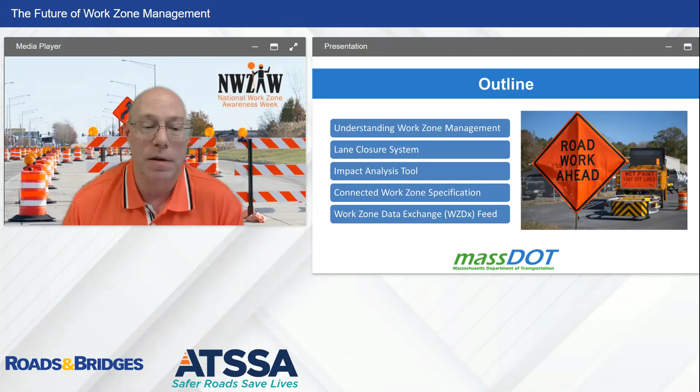Let's start with first asking the question, why is work zone management important? The data speaks for itself. Other than dropping a bit during the post-COVID year of 2021, the number of fatalities involving workers on the roadway shot back up to its highest number in 2022.

And I venture a guess that this level has not changed for 2023 and 2024. Looking at the types of events resulting in fatalities on our roadway construction sites, the worker on foot is clearly at the greatest risk. But more than a quarter of people are still dying while inside of a vehicle out in the work zone. They are seemingly thinking that they are protected. However, they are still being struck and killed. This effort is designed to end this horrible tragedy.

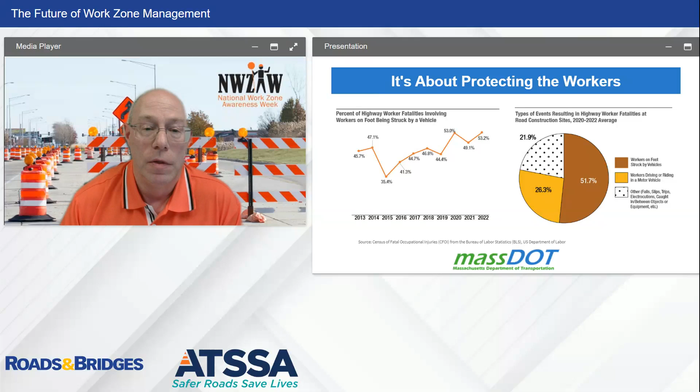Just a quick recap, National Work Zone Awareness Week, as Kevin mentioned, today is Go Orange Day. I hope that everyone, like myself, is wearing their orange today. Tomorrow is a Social Media opportunity to share stories and statistics about why work zone safety is so important and why we need to keep workers safe. Finally, on Friday, we pause for a brief moment to remember the lives of those that were lost out on the roadways, and hope that number never increases. Our workers deserve to go home each day to visit their family and friends.

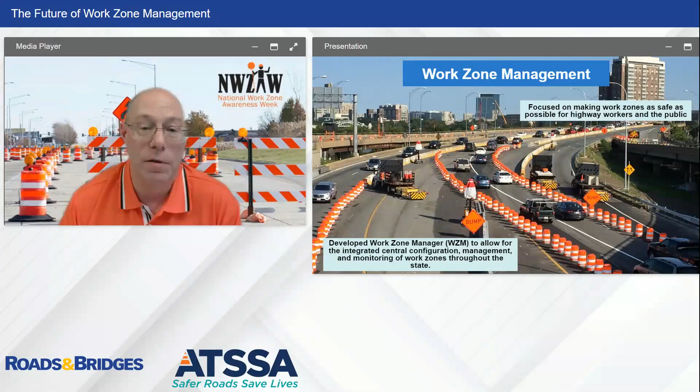This effort has evolved as we moved into the development of a work zone data exchange specification and data feed. What is the purpose of our Work Zone Manager application today? We want to have the ability to gather work zone data from a number of different sources and combine them into one uniform data set.

This will allow us to plot the various work zone limits into our state mapping layer and show where we have the different shoulder and lane closure work going on. This will improve the quality of the data that we capture and be more consistent when we have actual events going on.

The goal is to provide this data in a standard format to any and all third-party mapping companies, get this out to the public as an end user by any means possible, including our 511 system and pushing this into connected vehicles. We currently produce a work zone data exchange feed version 4.1, but we'll soon be updating to meet the new USDOT connected work zone standard.

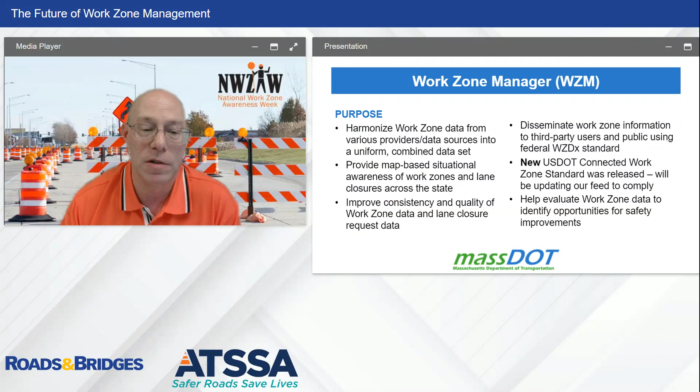Ultimately, we can use this data and performance metrics to improve on work zone operations and safety. The Work Zone Manager app is not only web-based, but it's a mobile-friendly interface as well. This allows our field staff to make adjustments as needed.

Some of the key features include: it's a one-stop shop to configure, manage, and monitor work zones across the state. We can view any of the portable ITS devices that we have deployed in the field, which we use to capture what's called the device feed. We have built-in reporting functions that allow integration of all planned events and allow the user to not only view what is coming, but also to go into historical data.

Focused at our boots-on-the-ground level is the ability to create lane closure requests and validate these requests with real-time feedback. Portable ITS devices in the field, when active, can be used to link planned events and validate closure. At the end of the day, it's all about having quality data and field-verified work zone data exchange feed updated on a minute-by-minute basis.

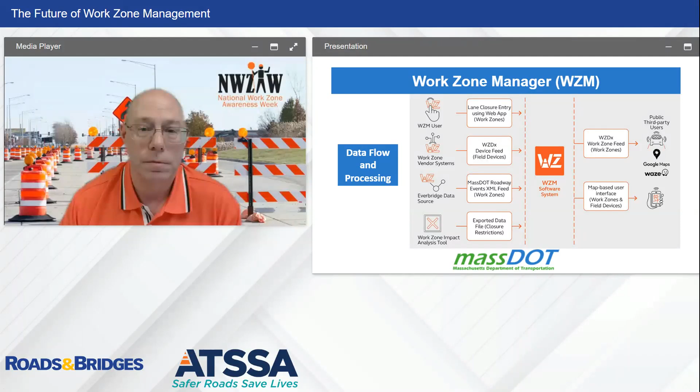This has a lot of information, but the key takeaway is that we accept data from 4 primary sources. The end user lane closure requests, so those are coming in from our resident engineers and our field construction staff. Then we have the device feed information from the field.

So if we have devices, work zone ITS devices so to speak, out in the field, we have that information that we're capturing in a real-time format. We also have other event data that is programmed directly through our operations center using what's called the Everbridge system. And then we have lane closures by time-of-day restrictions based on traffic volumes and project impact.

This information, I'll explain a little bit later, helps us to better plan. We can actually go out and take lanes on the roadway system. As mentioned, the output side provides a fully compliant work zone data exchange 4.1 feed that can be pushed to third-party end users, and a user-friendly map-based interface for our work zone forces to monitor what is happening out on the roadways at all times.

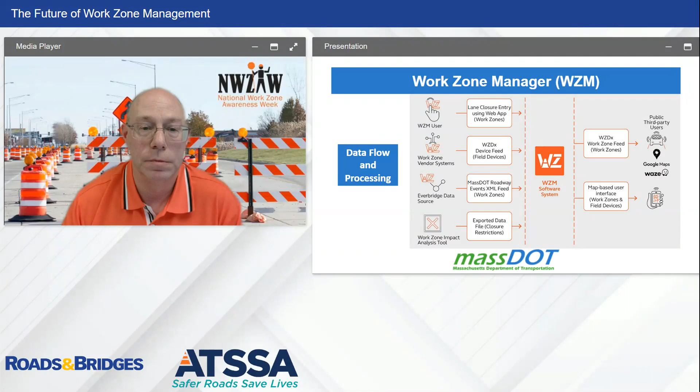One of the main functions of the Work Zone Manager software is the lane closure request and approval workflow. It is a web user interface for entry of closure requests, what we call planned work zone data. The users...

...of the system, it's all based on inventory data mapping components, which uses GIS for accurate location information. We've built in a number of checks and balances to prevent any incorrect data entry. It allows for the end user to schedule recurring events.

So in other words, if you're going to be taking the same number of lanes Monday through Thursday that week, it's easy for the data entry person to select that rather than having to go in and create something new for each day. The key is to have automatic validation against lane closure restrictions based on the number of lanes and the time of day.

The system provides visual warnings of these conflicts with any nearby events or when there's a restriction based on the time of day. Also note that the conflict detection with nearby events is configurable, but we currently set it as a baseline 1 mile radius.

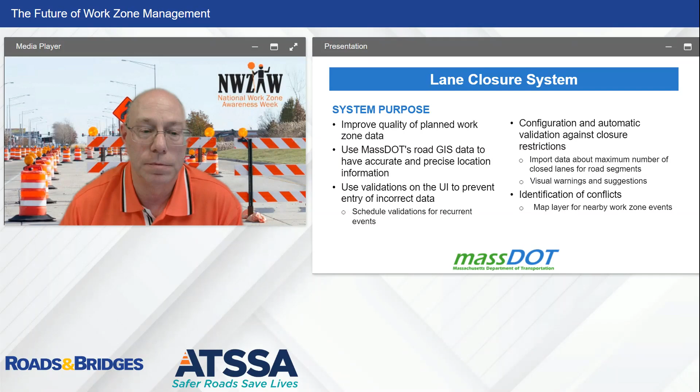Some more details on the lane closure request tool: we wanted to make it user-friendly and not overly burdensome to use. That being said, it's based on the required fields needed to meet what's required for the work zone data exchange feed and to be able to produce a high quality feed.

So this was explained to our construction forces, and we reconfigured the software as we were developing it to make it more user-friendly for them to understand and input, and to accelerate the process for them.

One of the key aspects we went through was tying it into MassDOT's mapping layer so that it automatically snaps to the roadway geometry based on the location data entered, such as milepost. We currently use milepost a lot to define our limits of work, which is an easy-to-use tool for our field staff, and it automatically snaps to that roadway.

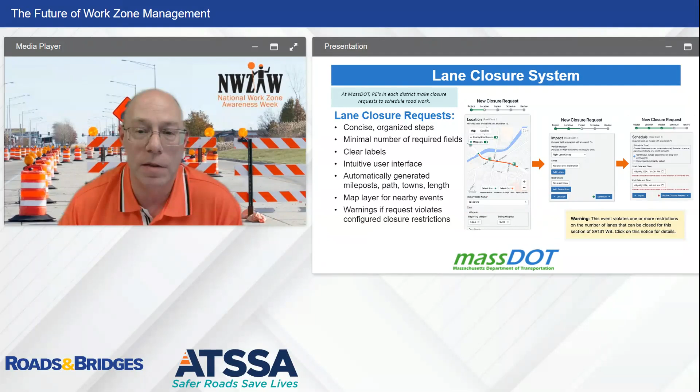And we also have the mapping layer, which identifies nearby planned events, and that allows us to flag anything that violates any of the restrictions that I mentioned earlier.

The success with this system is the requirement that construction personnel program their lane closure requests. We started with a focus on construction, but many of our maintenance projects at specific locations will be using the software as well. Having a defined approval process with checks and balances built in to prevent conflicts on the number of lanes being closed by time of day is necessary to ensure that we do not overlap.

The tool is also available with automated warnings of conflicts or restrictions that violate time of day use or the number of lanes, which helps make it far easier for the people reviewing these requests. Finally, we are just finishing development of an automated warning for geospatial conflicts, displayed on the map and instantaneously flagged to the person entering the request. We want to make it as simple as possible for those entering the request, and kick it back to them if there's a potential conflict before they even submit.

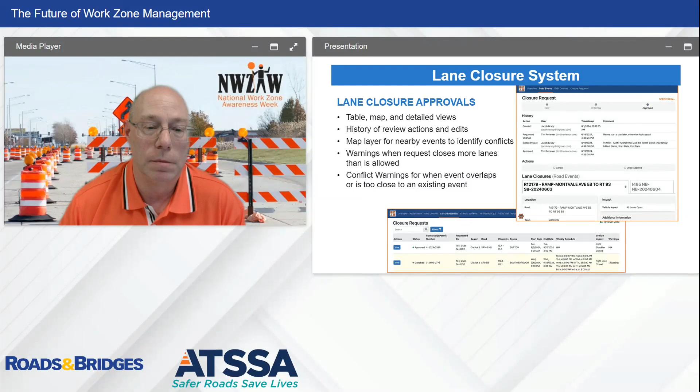So here we have a list view, and I know there's a lot of data on this page, of a number of lane closures. This allows us to sort and slice the data in any way, shape, or form to help us better check on what we have going on.

We have some things entered directly into the Workzone Manager tool, and some that we are currently porting over from our Everbridge system, which is what our operations center uses. However, starting in early May, five of our six districts will be at 100% utilization of the Workzone Manager tool. The last district does more of a bidding system, and we're currently working on a mechanism to bring them over, which probably will not happen until 2026.

The last column on this page has the status. So the individuals charged with reviewing and approving the different lane closure requests that come in will have the ability to quickly look and see when there's something in the system that has not been approved yet.

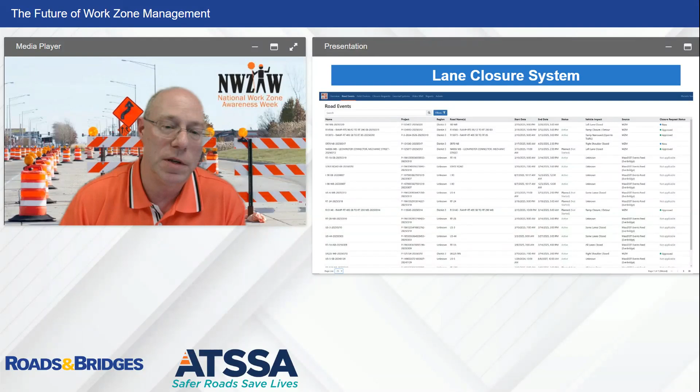Running in parallel with Workzone Manager, we've also been working with Kittelson and Associates to create a Workzone impact analysis tool. This tool is based on the FreeVal model, which incorporates the Highway Capacity Manual. It analyzes volumes and capacity on our interstates and freeways during times of day, allowing our districts to more effectively review lane closure requests and determine when we can extend work hours to help accelerate construction. Currently, Arcadis, the developer of our Workzone Manager tool, is taking this data directly from Kittelson and importing it into the lane closure request tool.

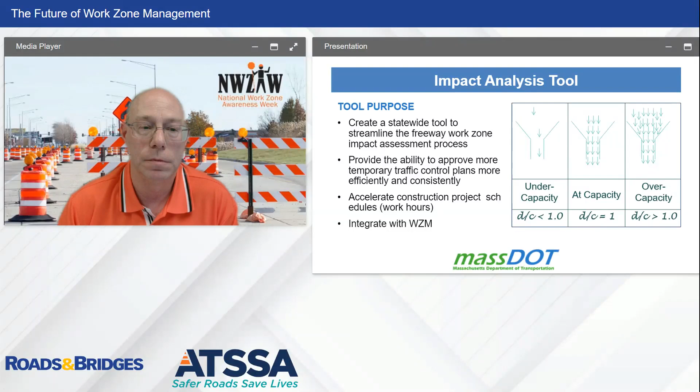Some more details on the impact analysis tool: it's based on our statewide traffic volume flow profiles for our interstate and freeway network, and has very detailed segmentation. Every time there is a change in the road cross section, a new ramp introduced—whether an on-ramp or exit ramp—or an auxiliary lane, all of this is segmentation, so we can get very detailed when defining the work zone limits.

Volume-to-capacity ratios help us better determine and adjust the time of day and the number of lanes that can be taken on any segment of roadway. For example, we can determine at what time only the shoulder may be closed on a particular roadway, and subsequently at what time a single lane can be taken off. We have the tool built with defined rules for certain roadway types, based on either time of day restrictions or, in some cases, as granular as specific segments based on known conditions in the Commonwealth of Massachusetts.

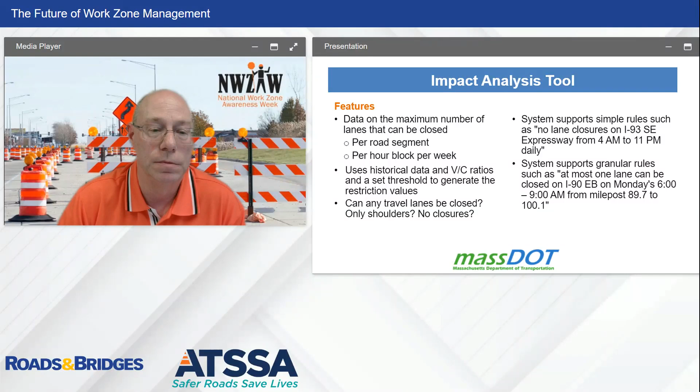Here is an example of the back-end data that Kittelson developed for MassDOT, allowing us to dig into the projected impacts on a specific roadway segment based on the hour of day. The base conditions are shown on the left side of this figure, and as you can see, the red area shows basically heat map technology—what would happen if we start to take a lane out of service at certain times of day, and how badly that queue would back up and extend beyond the segment reviewed.

This allows us to determine at what time we can contain that queue within a designated segmentation area and manage the expectation of motorists driving through without unnecessary significant delays. So we use this data, coupled with certain thresholds, to determine the time we can allow lane closures in the roadway system.

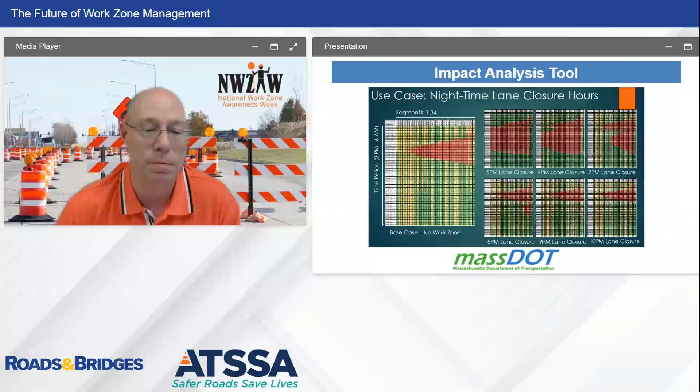The work zone impact analysis tool was initially developed as a design tool that would allow internal employees as well as our design consultants to evaluate different work zone scenarios for how to build the project and schedule the work. This will still take place. The expectation is that our designers and internal design staff will be looking at this, providing it as a suggestion, as part of the bid package that goes to contractors.

Contractors like to change means and methods. We'll at least have a starting point, and then working with our construction office, they'll make the determination of when and where they'll take lane closures. But in theory, it's all based on what should be coming out of the design.

We also developed a series of matrices, basically of shoulder and lane closures, and evaluate different scenarios where it's short-term work or long-term work, based on the capacity of each roadway scenario. The scenarios also take a look at what the condition would be on the roadway if it was a hard fixed work zone behind barrier, or if it was using traditional cones and drums. So a little bit more detailed for the designers to get into.

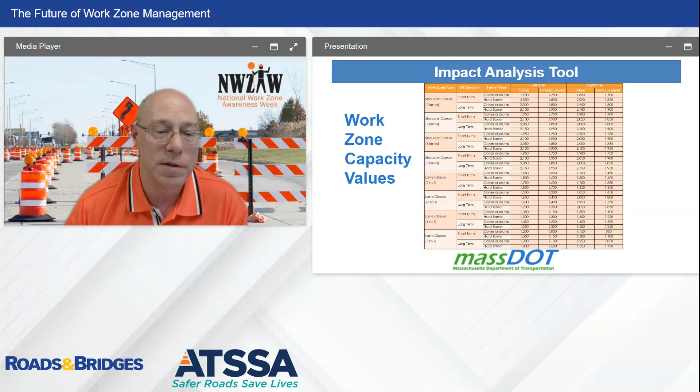Now I'm going to talk a little about our connected work zone specification. We are currently launching a new specification that will require, for all freeways and interstates, the use of connected work zone devices. This will allow us the ability to validate a planned work zone by having a connected device out in the field.

These connected devices include work zone location markers, which are used to identify the spatial extents of the work zone, typically a start and end marker. However, if you did have a change configuration, you may have some interim location markers.

A connected arrow board is used to transmit the location for that lane closure and display the status, such as right lane closure, and so forth.

We have a dynamic work zone speed limit assembly to display the work zone speed limit on a hybrid speed limit sign, transmitting its location and current speed limit display status. And then we have the more traditional work zone speed limit assembly, used frequently, that has a speed feedback plaque. Initially you will announce what the change in speed limit will be as you approach the work area, and then within the work area we're using the speed feedback sign to basically remind drivers that they need to be compliant.

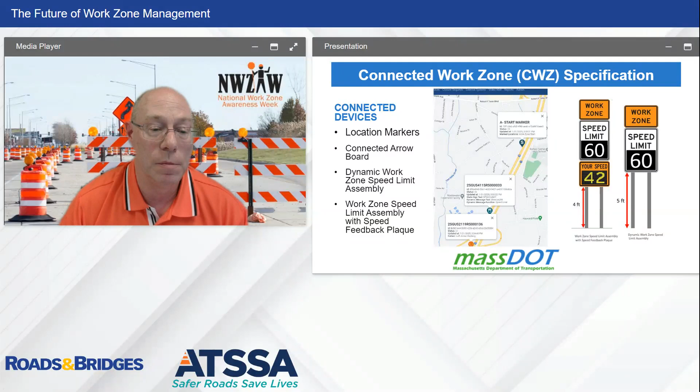Right now, with our automated validation process, a planned work zone that has ITS devices such as start and end markers, a connected arrow board, and a dynamic speed sign will have that information consumed by our work zone manager, digitally mapping the work zone operations. We're hoping third-party users will now get a validated planned work zone, but also get more specific information that allows them to push that detail out to end users on the roadway.

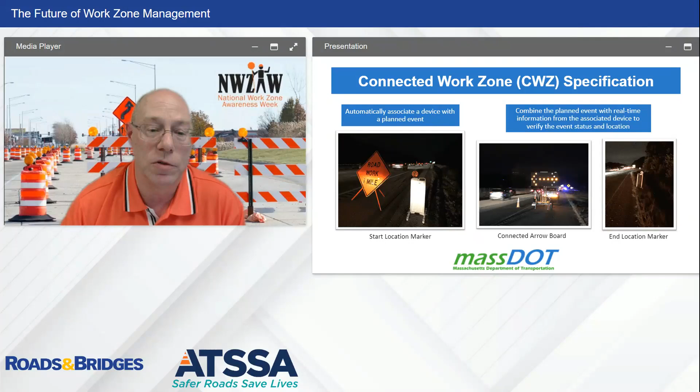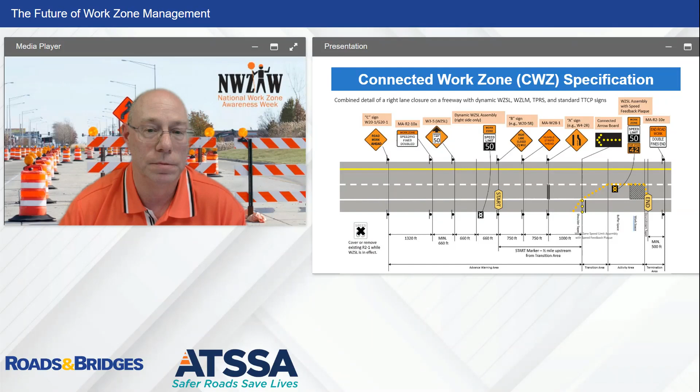MassDOT has secured four contractors to help participate in this connected work zone pilot kicking off this year. The Construction Industries of Massachusetts and the Massachusetts Aggregate and Asphalt Pavement Association are working with us to support this effort. For the pilot locations, we've identified contractors in different geographic areas doing different types of projects, all of which will have what we call routine nightly lane closures, so we'll have the ability to test out the system and how it's operating.

We did have some contractors express a concern about cell coverage, which is one of the reasons why I made sure that we covered different geographic areas. And the pilot will be funded through an extra work order that has federal highway support.

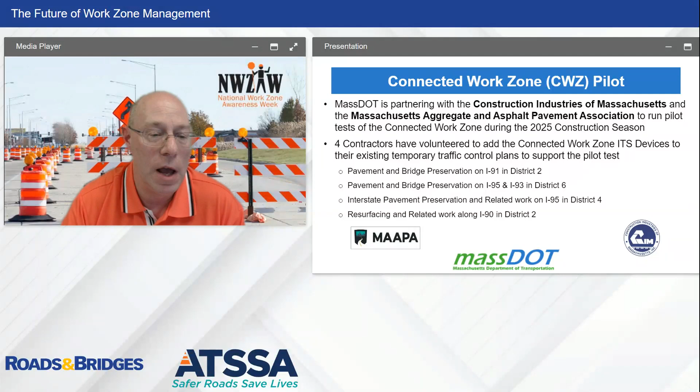As part of our connected work zone pilot, MassDOT will also be looking to evaluate connected vests. We are partnering with a work zone safety solutions provider in this effort. These are not currently part of our connected work zone notification specification.

However, we want to test them out through the use of dynamic speed limit. In other words, we want to only set the speed limit on the work zone when we have physical workers present, rather than just setting that work zone speed limit for a duration, so it reflects where the greatest risk is. We're looking to have at least 2 of these connected vests for each of the 4 different projects.

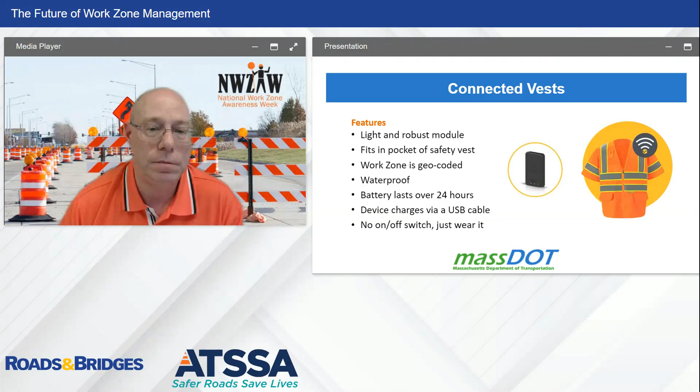So what are our next steps at MassDOT? We obviously want to get more data and more feedback from piloting our connected work zone specification. As such, we want to continue testing the automated device association process before we expand to other types of roadways. As I mentioned, we are focusing on interstates and freeways at this time.

This construction season, 5 of our 6 districts are coming online and becoming operational with their lane closure request tool. The end goal is to have that data captured to help us produce performance reports that will help us meet the requirements of the work zone safety and mobility rule.

And finally, the last and most important goal is to publish a high quality data feed, and hopefully soon the connected work zone standard feed, to let the public know where our workers are out on the roadway and where they need to be cognizant of their speed and pay attention.